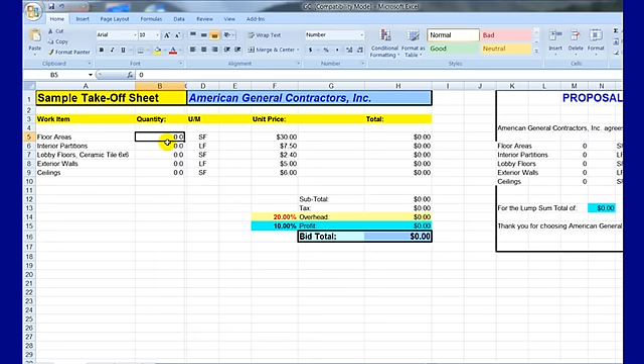It will work by itself or it'll work with other Windows programs, but we strongly recommend the best way to use Quick Measure on screen is right along with your own Excel spreadsheets that you've already got set up for yourself. So when you open up your Excel, you'll notice an add-in menu comes up here, and the Quick Measure menu here and the Quick Measure takeoff buttons come up here right inside your Excel.

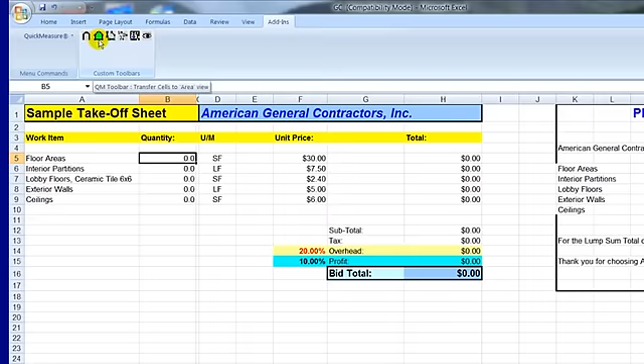So these takeoff buttons here, this button here is for measuring items by the linear foot, which is good for curb and gutter or walls, perimeters, that sort of thing. This takeoff button here is for measuring square footage measurements like floors and ceilings. Also measures an elevation view as well for square footages.

This takeoff button here is for measuring linear footages in sections or segments, which is good for, let's say, interior takeoffs, anything where you're measuring by the linear foot, in sections or segments where the linear wall measurements are all cut up. To the right here is the takeoff button for doing counts off of a PDF file. That would be if you need to count doors, windows, columns, outlets, that sort of thing.

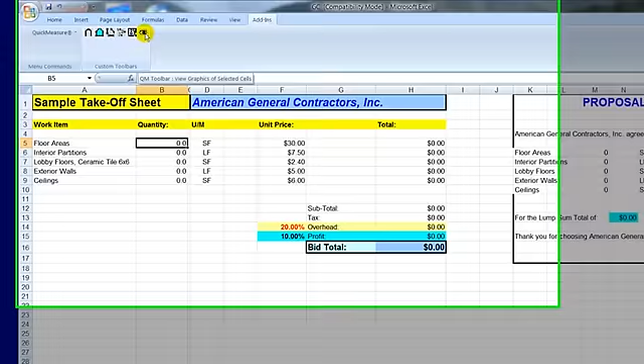And to the right over here is the lookup icon here. That's for every time we would make a measurement, we can go back and take a look at the original takeoff that we did off of whatever PDF sheet it was. So everything is tied back, the quantities are tied back to that cell of our original spreadsheet here.

So for each and every takeoff item that we've done, it's recorded in our Excel sheet here, and it's also recorded visually on each and every PDF sheet where you did the original takeoff. Now to do our takeoff, we will typically be working in the quantity column of whatever Excel spreadsheet we're in.

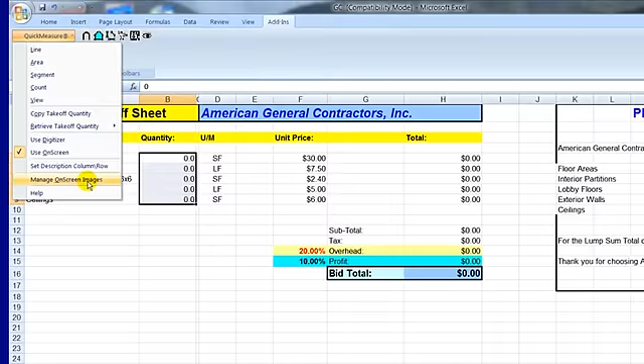Now we can do one item at a time, or we can highlight a series of items to do a takeoff. So we'll start here with maybe some square footages, and we'll go out here and we will look at our CD here, this is where you would go out to your CD or maybe some Windows folders where you've downloaded a bunch of PDF files and the various bid folders here.

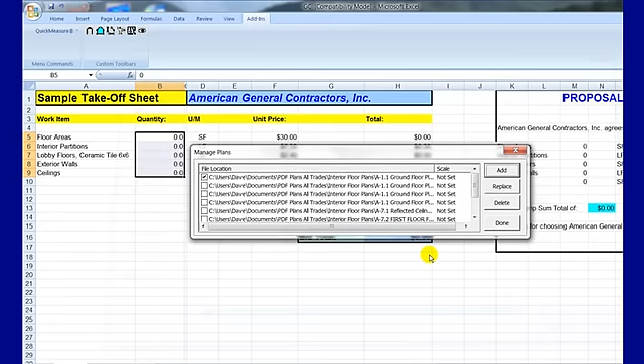And we can just open up a folder here and we have a variety of PDFs that we've downloaded here. So we can work on any number of PDFs at the same time if we want. We can just select as many as we need to. We could have 15 or 20 different sheets if we needed to work on all those. That way it makes it really easy to flip around various sheets in case you need to look at some details or some specs.

So we'll select the sheets we want to work on, then we'll start with a couple square footage takeoff measurements here. We'll hit the square footage takeoff button at the top, and that'll bring up those PDF files we just selected from the Windows folder.

You notice they show up down at the bottom here in a tab format. You can also rename any of these tabs, because one of the problems with these CDs they send you is they may or may not label each sheet with a good description, so you can go down here and rename any of these sheets you want. It makes it a little easier to flip around drawings.

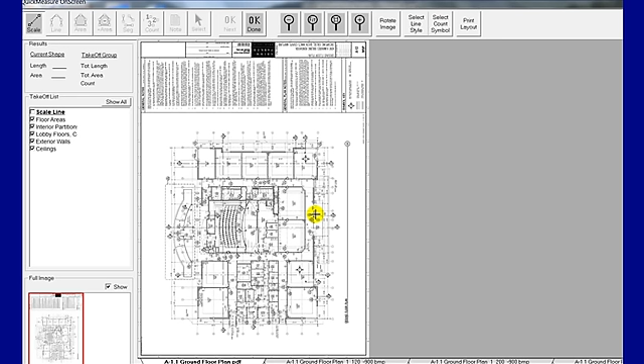Now what you're looking at right here is a full sheet that's been scanned in vertically, so we'll use the rotate image button up here, and that'll swing that sheet around so we can look at it head on. So now we have the full sheet, the original blueprint — this is the digital image of that particular blueprint.

Now to work on doing our takeoff here, we have some screen handling features which make it really easy to get a good look at each sheet you're looking at. You use the scroll wheel on your mouse to zoom in here — you can see how that moves you in very quickly and also moves you back out very quickly.

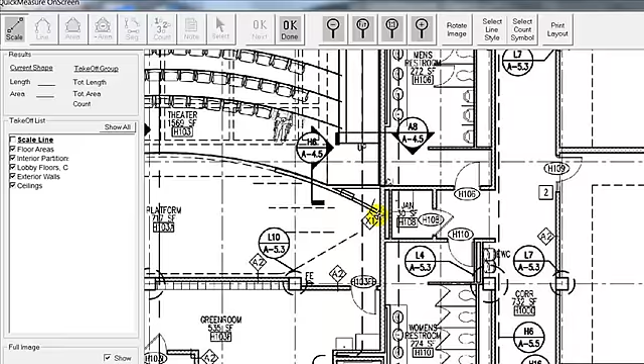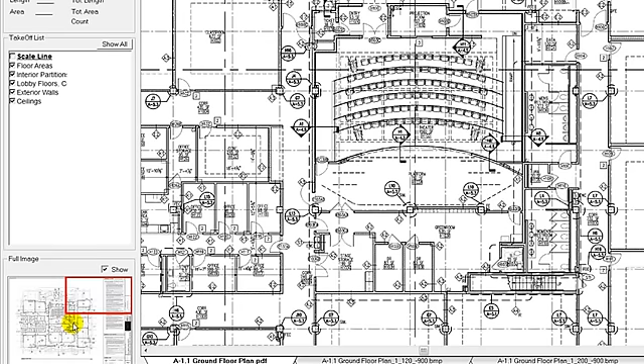As well, if you hold down the right button on your mouse, that brings up a little grab utility, and you can see how you're able to quickly maneuver around the drawing. In the lower left-hand corner, you also have a full sheet view — anytime you click to the lower right it brings up that view, or the upper right clicks that, and if you want to click in the center it brings it back up. So using your scroll wheel, your grab utility, and the full sheet view down in the lower left, you have full control of navigation.

Now, any estimators who have worked with digitizers in the past know that you have to apply a scale to any particular sheet you're working on, just like with a digitizer. Only in the digital world, how this is done is we'll find a known dimension line somewhere on the drawing, or take the graphic scale. If there's no dimensions anywhere on the drawing, we can always use a 3/0 doorway or a 6/0 doorway or a column line. But you do have to put a scale originally to do the takeoff here.

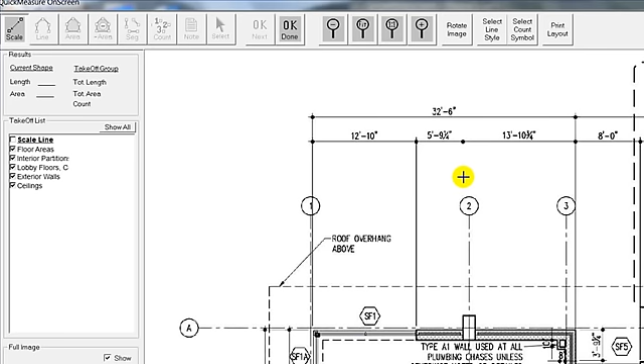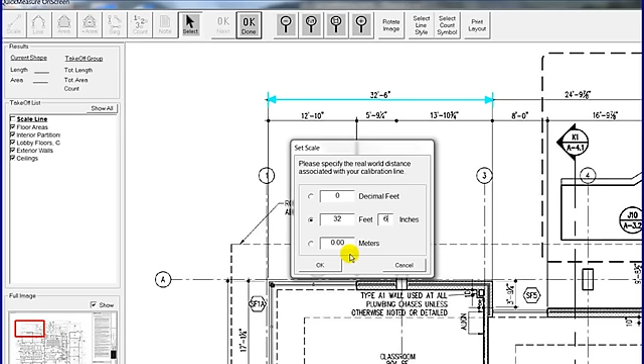So we'll find ourselves a scale line and click on the scale button here in the upper left-hand corner. What we'll do is simply mouse click on one end of that known dimension line, swing across to the other end of that line, then hit the OK Done button. We'll type in that distance represents 32 feet and 6 inches, just like it indicates there on the drawing. That'll now apply a scale to this particular drawing.

So it doesn't matter if you zoom in or zoom out, it's still going to be kept at the original scale. As a matter of fact, if you look down at the bottom of the screen here, you see it's actually at 8 scale right here — it says 1 inch to 8 feet. So this is 8 scale.

So in order to do our takeoff here, you see these items came over from our spreadsheet. These are the items that were over in the description column, so they brought over automatically. Of course, if you had your own spreadsheet, the box here would be full of all the items you were taking off.

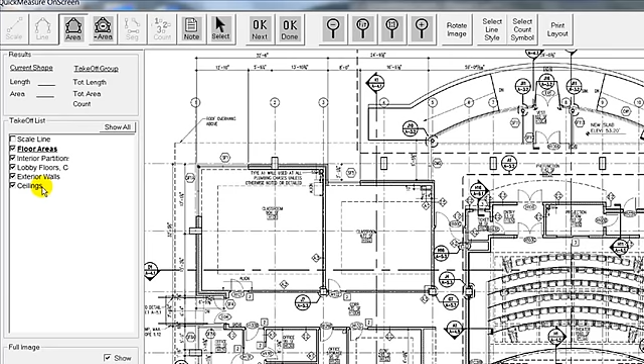Now, when we get ready to do a takeoff, we can select different colors, just like you would use a highlighter on a set of paper drawings. So we'll select, let's say, a red color here to do these floor areas. All you really do when you want to measure floor area or ceiling square footage is take your mouse and click around the perimeter of whatever area it is you want to measure. It doesn't matter what shape it is — you just pan around the drawing here.

If I want to go over here and do measurement, I'll use my grab button there, and you're really just clicking with your mouse going around the perimeter of any area you want to measure. Now, if you need to do multiple areas, you can do that. You can even do radial or circular shaped areas by tracing around the area you want to measure, or just mouse click around, whatever's more convenient. That allows us to do an unusual shaped area like that as well.

Once we do that item and hit the OK Done button here at the top, you notice that it takes that quantity we just measured directly back to that cell of the spreadsheet. So we have 4,418 square feet of floor area, which goes directly back to that cell of the spreadsheet. Of course, whatever calculations are performed from there depends on what you've set up for yourself in your Excel spreadsheet. This is a simplified version we're using here.

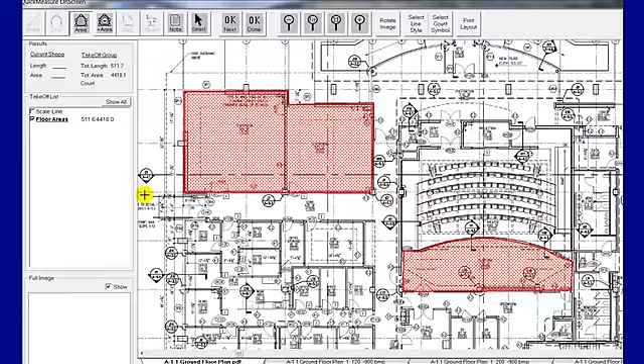But anytime I need to see how that takeoff was done, I can go back here, use the lookup icon, and that'll show me exactly where that original measurement came from. You can see this is the sheet where we took that original floor area measurement. So that's always there for us to see anytime we want it. If we ever have a question about where that original number came from, there it is.

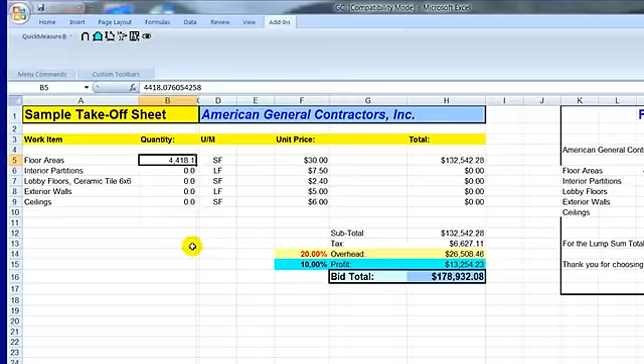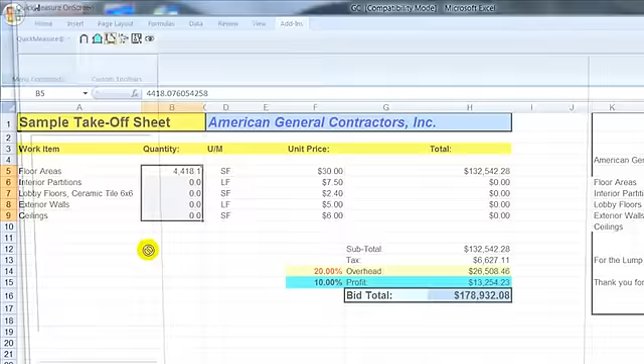Now, if we want to go through and do some other items here, we'll just highlight those, and let's say we're going to do some linear footages or something like that. We can go in and click over here to indicate we're going to do some partitions, and for those we can select a certain type of color, maybe a green color or something like that.

We're going to do a linear footage takeoff here. So to do that, really all you're doing is mouse clicking on either end of the wall, just like you would do if any of you guys out there have used digitizers. You're just clicking on either end, and what you're going to do is run up the total linear footage of any particular partition type or wall type. So you're basically just mouse clicking along.

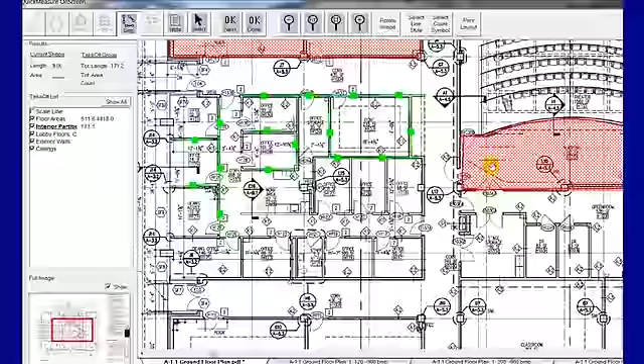You can zoom in if you like, using your scroll wheel on your mouse if you like to do takeoffs like that, so you can really get a good visual view. A lot of estimators worry about working on these digital plans, that they'll miss something or get confused about what they're looking at. But once you get used to it, you'll see that it's very, very accurate and very quick.

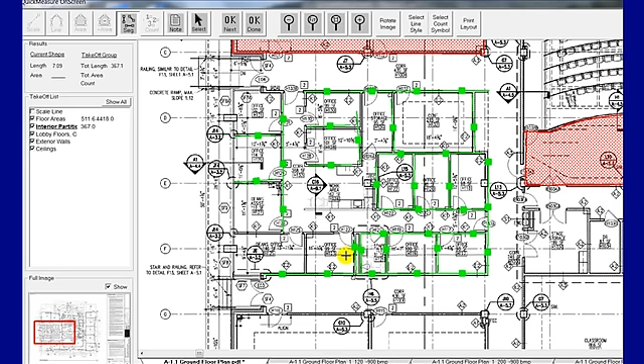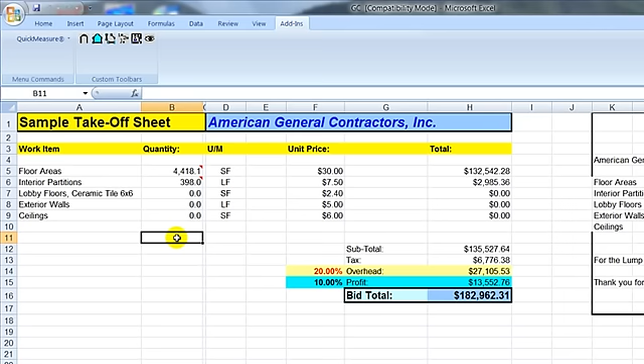So in this case we're just doing linear footage measurements in sections or segments, and we're just mouse clicking along here. Now again, once we finish with this particular measurement, we hit the OK Done button, and it throws that quantity directly back to that cell of our spreadsheet. Again, whatever calculation you've got going on in your spreadsheet is already set up there for you. The idea here is that the QuickMeasure OnScreen program is allowing us to do our takeoffs very quickly off the PDF, and then it throws that quantity directly back to the cell of the spreadsheet.

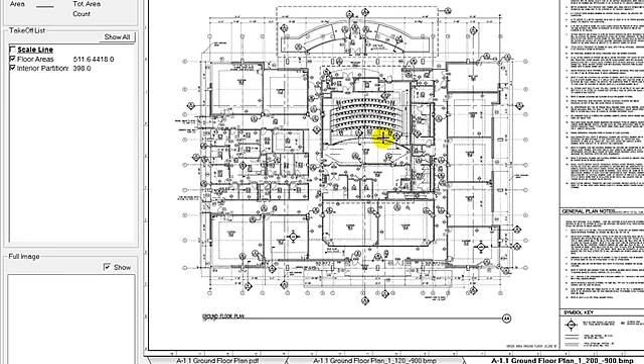You can then print this image out on a piece of paper if you want and put some notes in, or store it back to your hard drive along with the original spreadsheet. We can flip around to various PDF sheets here and do some more takeoffs off all these, and everything is then stored back to the original Excel spreadsheet we were working on. So everything is nicely organized, and you always know how each and every item you've taken off on all these PDFs relates back to your original spreadsheet setup.